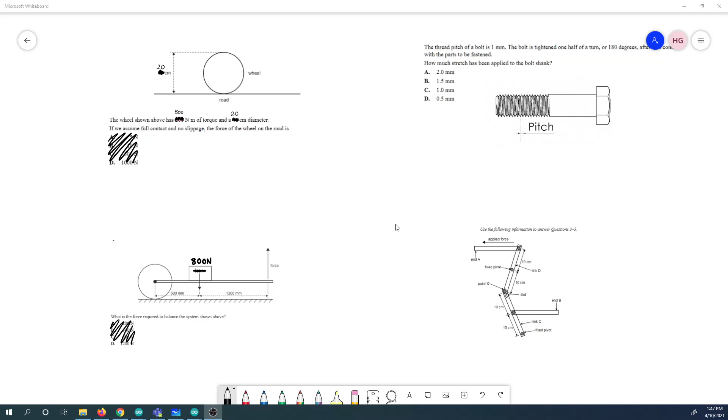All right, first up, here's a pretty classic torque and force question. We've got a diagram laying out what's going on. We've got a wheel with a diameter of 20 centimeters, and it's telling us there's a torque on this wheel of 800 newton meters. It's reminding us what the diameter is, and here's the situation: we're assuming full contact and no slippage, in other words, the force is all going where it's meant to be going.

What's the force of the wheel on the road? We know that torque is equal to force multiplied by distance. But we're not trying to find torque, we're trying to find force, so let's divide both sides by distance and rewrite our equation as force equals torque over distance.

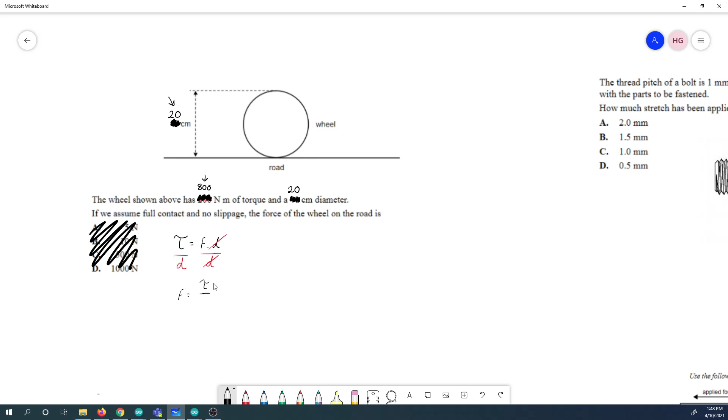So what's our torque? We know our torque is 800 newton meters. And we know our distance, well, we can figure that out. If this is a torque on a wheel, the torque is being applied at the axle of that wheel. So the distance from where the torque is to where the force is being applied is actually the radius of this wheel, not the diameter. So the distance in this case is 10 centimeters.

And because we should always be converting to meters in this subject, it just makes things so much easier, that is 0.1 meters. So 800 newton meters divided by 0.1 is going to give you 8,000 newtons. All right, so that is the force of the wheel on the road.

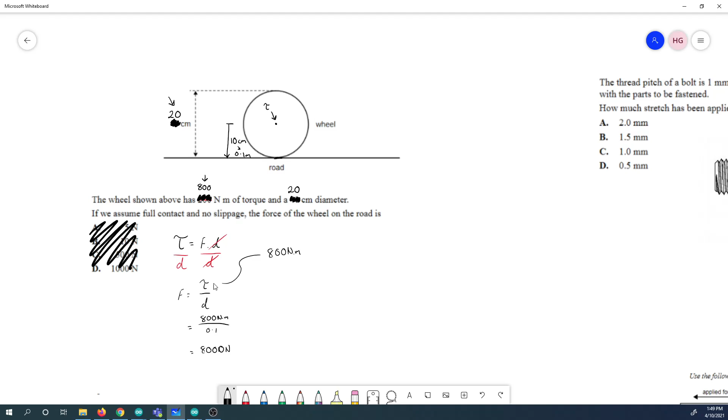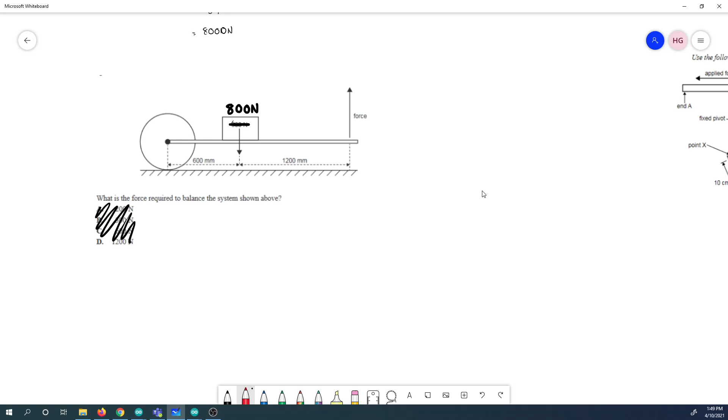All right, moving on. Okay, so here's a pretty classic leverage question, a lever question with a wheelbarrow. Now the first thing I do when I look at a lever problem is I try and figure out, okay, what class of lever am I looking at? So let's go, here's the fulcrum, here's the load, here's the effort.

So we know those things. Now, what do we know? We know that the distance from the fulcrum to the load, which we call the distance of the load, is equal to 600 millimeters or 0.6 meters. And we know that the distance from the fulcrum to the effort is equal to 600 mil plus 1200 mil, so that's 1800 millimeters or 1.8 meters.

It's really important when doing these questions that you identify your distance of the load and your distance of the effort from the fulcrum, because sometimes they'll put measurements in like this, which is designed to trick you. All right, so now what's the question actually asking? What's the force required to balance the system shown above?

Okay, so if we're balancing the system, it means the torque of the load and the torque of the effort are equal. And so to solve that, we can use the law of the lever. Now, the law of the lever, I'm going to take a little bit longer than I would if I were actually answering this question. So torque is equal to force by distance.

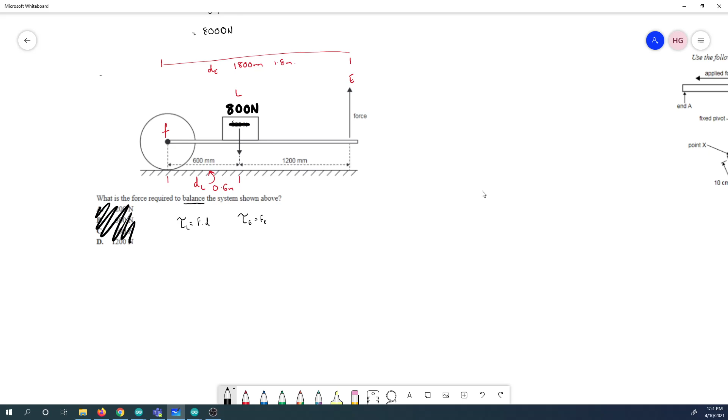If we think about the torque from the fulcrum to the load and the torque from the fulcrum to the effort, if those are the same, if they're balanced, then the torque, we could call this torque load, and we could call this torque effort, would be equal. So we rewrite this as what's called the law of the lever: the force of the load multiplied by the distance of the load is equal to the force of the effort multiplied by the distance to the effort.

Now, what do we know? We know force of the load, so force of the load is 800 newtons. We know the distance of the load. We know the distance of the effort. The only thing that we don't know is the force of the effort. This is our unknown here.

So we can solve this by rearranging this equation, just dividing both sides by the distance of the effort. Cancel these terms and rewrite this equation as the force of the effort is equal to the force of the load multiplied by the distance of the load divided by the distance of the effort, which is going to be, what have we got? We've got 800 newtons, that's the force of our load. We've got 0.6 meters, and we are dividing all of that by 1.8 meters.

And working that out is going to be, that is going to be... you know my mental arithmetic is really poor.

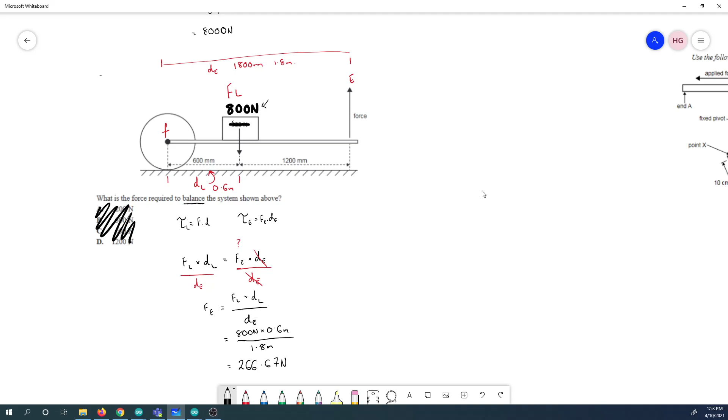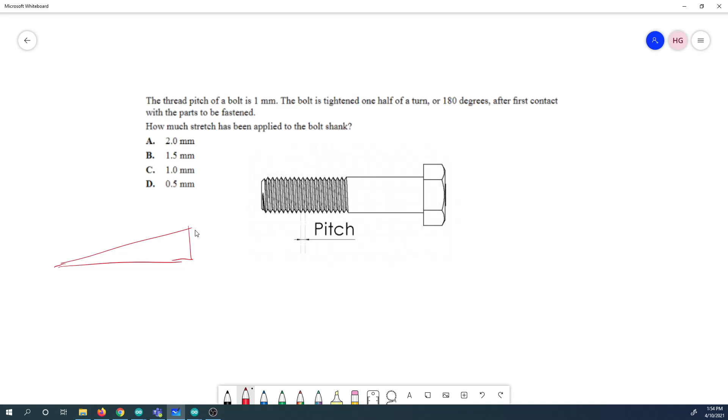Right, what do we got now? We've got a bolt, and it has a pitch, and I'll explain what we mean when we talk about pitch. If we think about what a bolt or a screw really is, it's really a wedge that is wrapped around a cylinder. And the pitch tells you how much distance this slope moves through per rotation, or per revolution, of that cylinder. That's given in some sort of measurement, and in this case it's 1 millimeter.

So what this means is that when the bolt turns once, you've moved from here to here, and that distance is 1 millimeter. So you've also moved the bolt 1 millimeter.

Now let's talk about what the question's actually asking. The bolt is tightened 1/2 of a turn, or 180 degrees, after first contact with the parts to be fastened. So what this is telling us is that we've got one thing here, and let's draw something in cross section. Let's say we've got one metal plate, and we are fixing that to another metal plate, and that's going into a threaded hole. These pieces have made contact, they're all snugged up against one another.

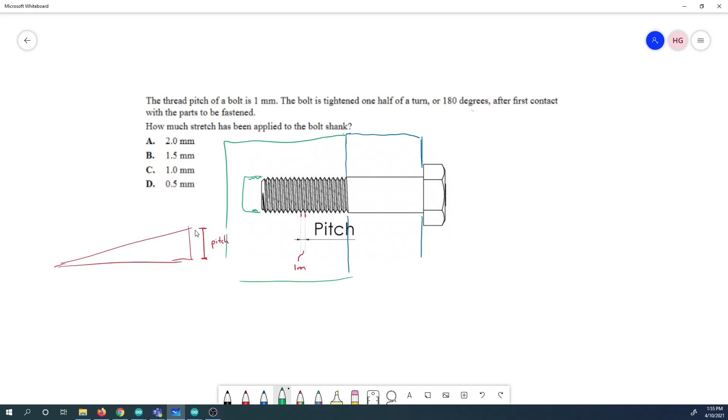Now, if we turn this bolt 1/2 rotation, we have moved this thread half of the pitch, because we've moved it 1/2 rotation. So we've moved it 0.5 of a mil. Now, what's happened here? If this has moved 0.5 of a mil, but these parts are all pushed up against one another, something has deformed. Something's deformed in order to allow that to happen, because otherwise it just wouldn't work. This bolt, these plates, they have to go somewhere.

So what's happening in this scenario is that the shank of the bolt is actually stretching. We assume that it's stretching in this example because that's what it's told us. It hasn't told us that this other material is compressing, or that this bolt head is biting into this metal and removing some of the metal, although it should have a washer there. But that's neither here nor there for this example. So it's stretching the shank of the bolt, and it's stretching it half the pitch, because it's rotated half a turn, and the pitch is 1 millimeter, so it's 0.5 millimeters. I hope that makes sense.

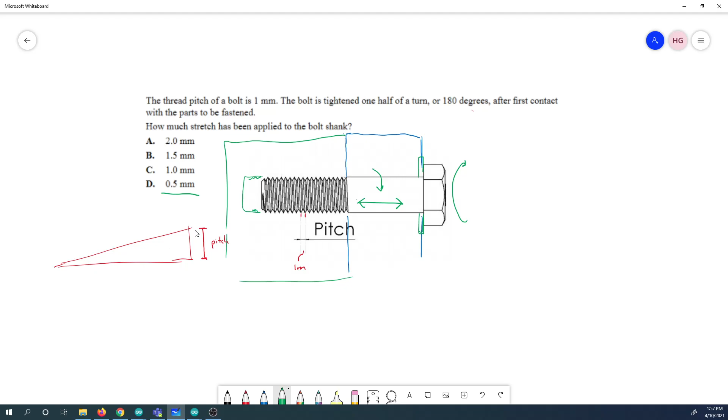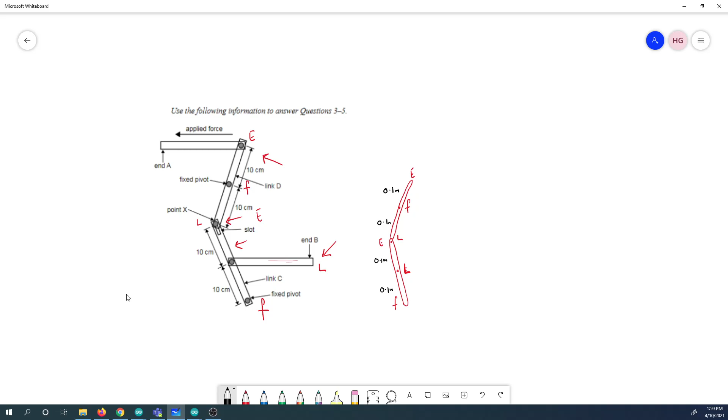All right, so let's also look at what kinds of levers we're working with here. So effort, fulcrum in the middle, load at the other end - this one here is a first class lever. And this one down here, fulcrum, load in the middle, effort up one end - this one here is a second class lever.

So let's look at the mechanical advantages on this particular lever system. So this first class lever, the distance of the effort - that's the distance from the effort to the fulcrum - and the distance of the load - that's the distance from the load to the fulcrum - are the same, right? They're both 0.1 meters. So this actually gives you a mechanical advantage of 1, which is to say, for every unit of force you put in, you get a unit of force out.

It's not a multiplier, right? It's just 1. Cool. This one here, so let's look at this. So the distance of our load is, in this case, 0.1, because we've got fulcrum to load, that's 0.1. But the distance of the effort is from the fulcrum to the effort up here, so that is actually 0.2. So we've got our distance of our effort is twice as long as the distance of our load. So this lever here is giving us a mechanical advantage of 2, or 2 to 1.

So the total mechanical advantage of this system is the mechanical advantage of this first lever, which is 1, multiplied by the mechanical advantage of this second lever, which is 2. So our combined mechanical advantage is 2, or 2 to 1.